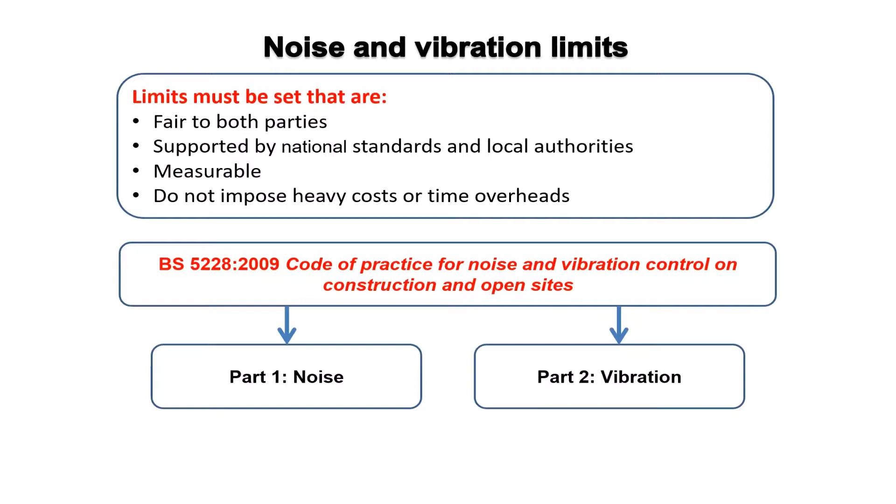Obviously, if we're going to set limits, then they've got to be measurable in some way. So we're going to have to put instrumentation in there so that we quantify noise and vibration, and I'll cover that in some detail. And we've got to be realistic that we can't put in instrumentation which is so expensive that it jeopardises the economic viability of the work. So we've got to be pragmatic about what we do here. And as I say, BS 5228 is an excellent code of practice, giving lots of guidelines and help. And I've brought some copies with me today, so if you're not familiar with that standard, it's worth having a look at.

Now, there's legislation which backs up the noise and vibration exposure of residents, and it's worthwhile just being aware of what that is, because that can have an impact on how you go about measuring noise and vibration. And the overall legislation is covered by common law, and in common law there are clauses which allow citizens who might be affected to prevent or secure the abatement of a statutory nuisance. That's the terminology that's being used there. And they specifically mention the control of noise and vibration from construction sites.

So at the end of the day, if everything breaks down, then citizens have the right under common law to try and get the work stopped. But there are some specific bits of legislation which are worth noting. There's the Environmental Protection Act, which gives the mandatory powers to local authorities to control a noise nuisance.

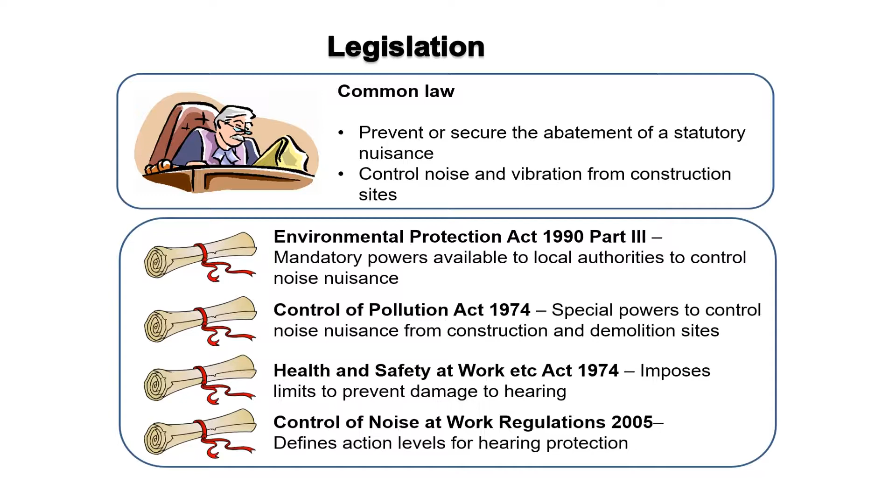And then there's the Control of Noise at Work Regulations 2005, and that defines the action levels required for hearing protection. Again, it's to do with workers on site and the level of noise that they can be exposed to. The Control of Pollution Act has two sections in it which are worth drawing your attention to.

Section 60 is all about the powers that a local authority has to, when they believe that noise is being exceeded or vibrations being exceeded, or when you start a project and you're applying for planning, specify equipment used. So if you're generating, let's say, a lot of noise from a site and you've done no liaison with the local authority in advance, and someone makes a complaint and measurements subsequently show that you are over an acceptable limit, the local authority can step in and specify that you use different equipment.

They can specify that you work different hours, and they can change working practices. So the local authority has a lot of power if you don't take precautions in advance of carrying out some potentially noisy work. But Section 61 of the same Act is a consent, and this consent is often in the form of a long form that you fill in with the local authority.

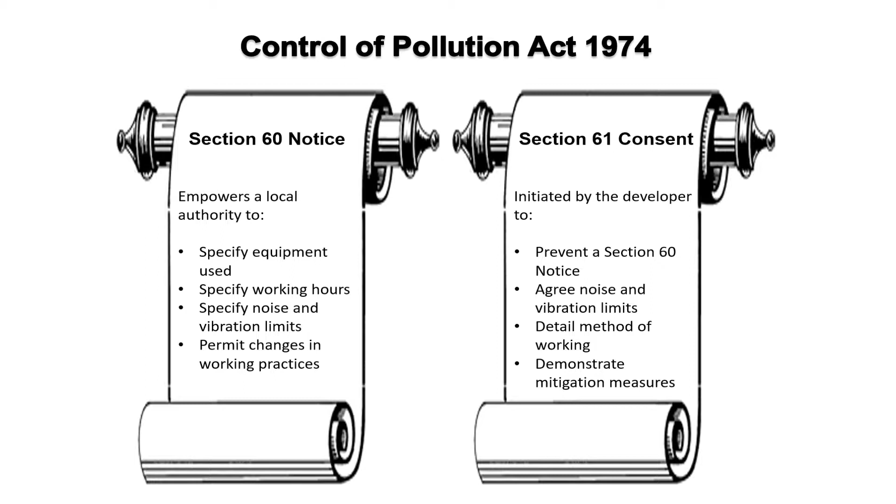So not only is it good practice, if you're going to do some noisy works, to plan what you're going to do in advance and to make sure you're using the right equipment, but if you agree with the local authority within a Section 61 consent in advance, it gives you the protection to ensure that your work won't be stopped, as long as you obviously keep to your agreement, by people who are complaining.

Just like to say a little bit about what is noise, physically what is noise. Noise is a sound. It's a pressure wave in the air that has been initiated by the vibration of some hard surface. So that hard surface might be a concrete slab, and you're hitting it with a metal chisel, and the surface vibrates. That causes the air locally to the surface to vibrate, and that transmits through the air and reaches your ears, where it's turned back into a signal and the brain interprets it as noise.

Generally, noise is defined as unwanted sound. So sound is the general term for vibrating air pressure, and some sounds are good, like music and speech, and you want to generate those sounds, and some sounds are unwanted, and we tend to term those noise. The pressure waves lose their strength with distance, so the further you are away from the source, the lower the sound. That shouldn't be any surprise.

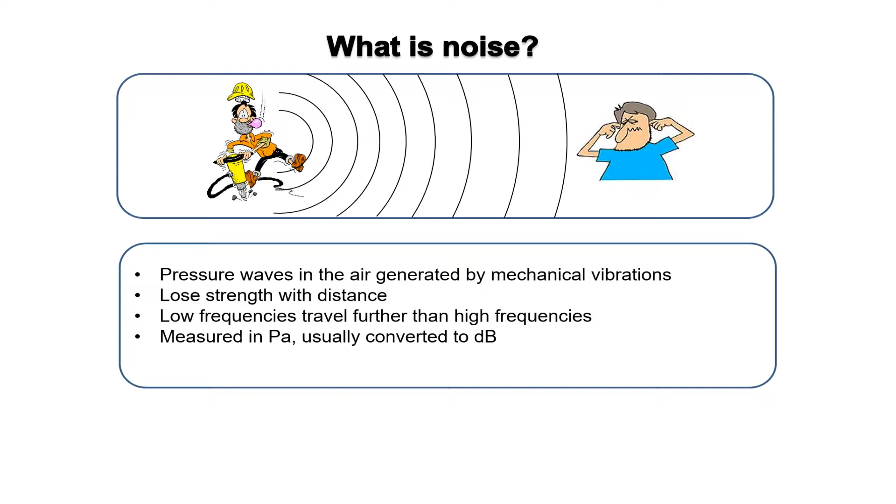Because noise is an air pressure, when a microphone measures it in the air, it's in a pressure term, like pascals. But we always think of noise in decibels, and decibels is just a logarithmic way of describing pressure in pascals. And we tend to use decibels as a logarithmic measure because our ears hear in a logarithmic sense, not in a linear sense. So it makes it more useful to describe a noise, air pressure, in decibels rather than pascals.

How does noise affect people? Well, unfortunately, it's not uniform. Different people are sensitive to noise in different ways. But in general, we can think of noise depending on how loud it is, what's the maximum pressure that we're generating in the air, how long we're exposed to it, so the duration of the noise, when it occurs, so if we hear a noise at night, we're likely to be more disturbed than we are during the day.

The local environment: if we're living in a busy urban environment, we're less likely to be disturbed by noise of a particular level than if you live in a rural environment where things are generally quiet. And tones in noise are also a disturbing feature. So if there's a background noise and there's a single tone in it as well, even though the level might not be excessive, you perceive the tone, and that can be quite disturbing.

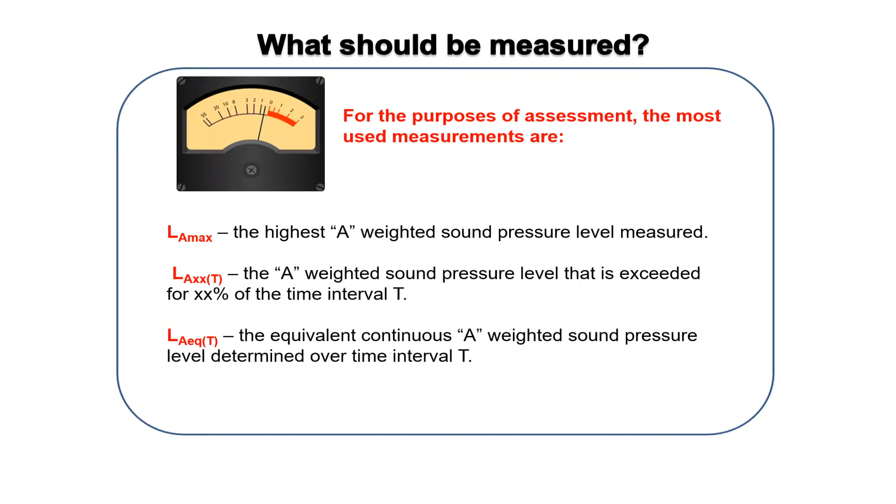LA is the A-weighted sound pressure level. EQ means equivalent, and T over a period of time. And essentially, the T will be either a 16-hour daytime period or an 8-hour nighttime period. That's generally how T's are used there. Although they don't have to be, they could be 1 hour, they could be 5 minutes. But generally, when the limits are set, they are for a 16-hour day and an 8-hour night.

And the LAEQ is the equivalent continuous noise level. So if you were to take all the noise gathered, the peaks, the troughs during the period T, and you do a logarithmic averaging of it to get to the equivalent sound level, you would arrive at LAEQT. The instrumentation will do this for you. It's too big a calculation for you to take individual measurements and try and do all that independently. But sound meters will carry out that averaging process to get an LAEQT. And that's the measure that's most commonly used when looking at limits.

Where should noise be measured? That isn't obvious either, because if you were to put a microphone in the middle of a field, perhaps I shouldn't use the term field, it's called a free field measurement, but it has nothing to do with the field. If it's unaffected by reflecting surfaces, then that's called a free field measurement. And it will be a different value that would be measured compared to putting the microphone close to a wall.

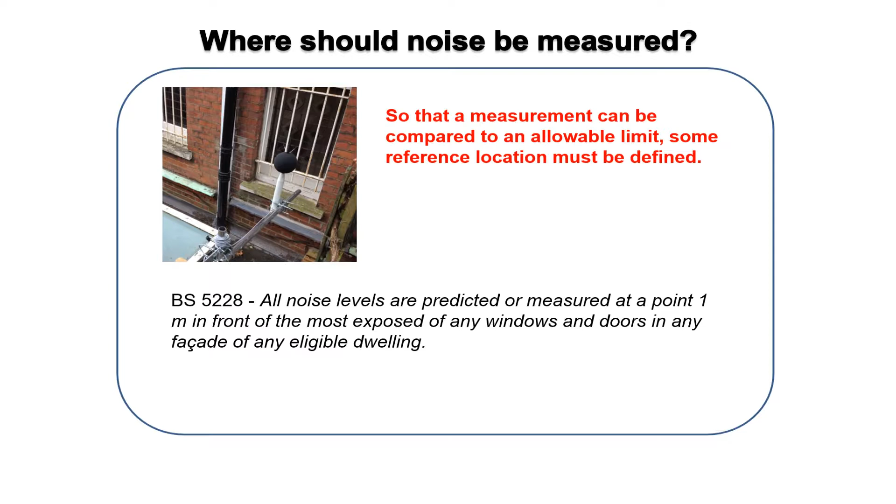So normal practice is noise levels measured 1 metre in front of the most exposed of any windows and doors in any facade of any eligible building nearby, any sensitive building, the one you want to protect. So that's where you should measure. We discussed what you should measure. Now we've got to set a limit for how much sound you should be exposed to.

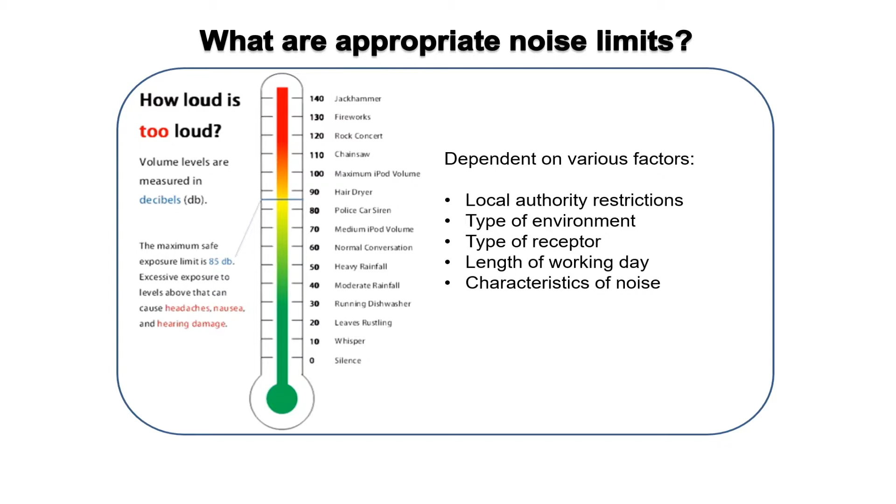Now I've put this chart here just to give you a feel for what decibel levels mean. So 0 dB is defined as silence. It's of course not silence, there's still some air pressure there. It's just the threshold of hearing of the most sensitive person. By the time we get to 60 dB, that's normal conversation. I'm probably speaking about 65 dB here, a bit louder.

When we get to 85 dB, that's the point where hearing protection should be worn. So if your neighbours are being exposed to 85 dB, then you're really putting too much noise over the boundary. And then you can get up to a rock concert at 120 dB. In my opinion, permanent damage is starting to occur at that point, so you should wear hearing protection at a rock concert. Fireworks, 130 dB, and a jackhammer, 140 dB.

So the most common limit level that's set is 70 dB. So we're talking of exposing people to a continuous level of something like a medium iPod volume, which would be one of the more common values that have been set.

Now, there are 3 ways in the standards for setting limits. The earliest limits, the oldest limits that were set, were from the Wilson Committee report in 1963. They're going back a long way there, where basically it didn't really matter where you were. You could expose people to 70 dB during the day and 60 dB at night, and we just set those limits, and as long as you adhered to those, you were deemed to be compliant. We're going away from that now, and you'll find those limits used much less.

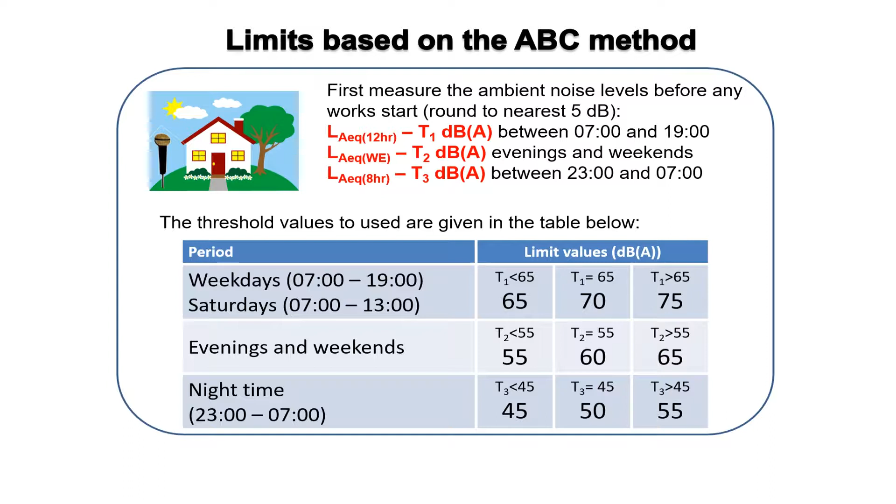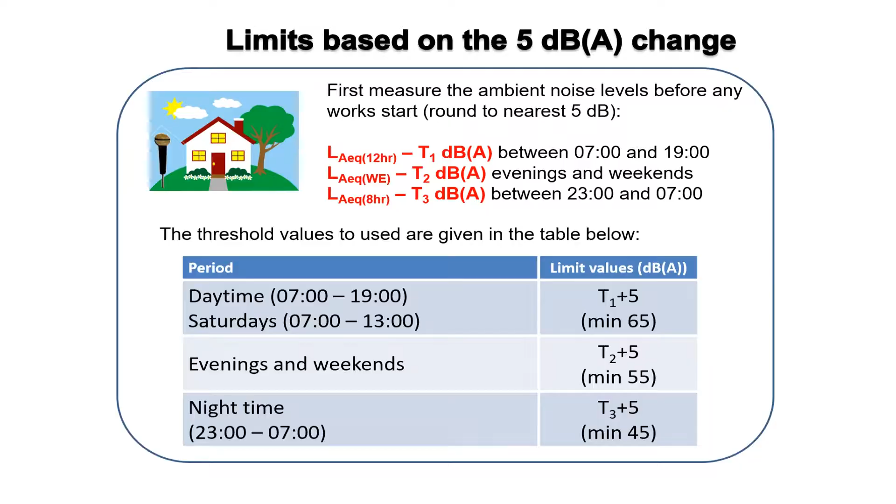So that's trying to take into account the type of environment that people are living in and assess the limit according to that environment. So if they're already used to a lot of noise, then they can be exposed to a bit more. And the other one is quite similar, and it's based on a 5 dB change. So again, you take the background readings in exactly the same way, and you are allowed simply 5 dB more than whatever that background reading was, subject to certain minima.

So during the day, the minimum is 65. In the evenings and weekends, it's 55, and at night times, it's 45. So it's quite a simple method, but there is a bottom threshold for it. How do we measure noise for comparison with limits? And there are various different ways of doing that.

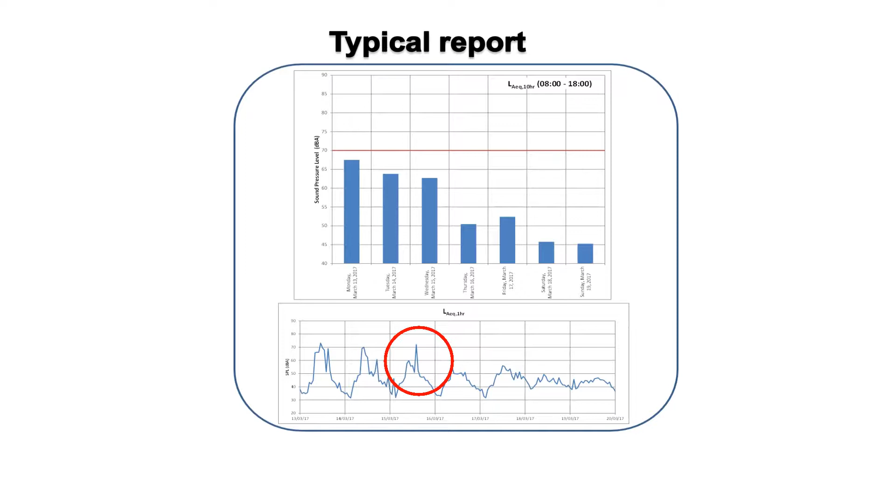And that can be quite useful, because if you take this particular day here, corresponding to that overall level, all we knew from this graph at the top was that the LAEQ value was whatever it was. Here we can say, well, it was really dominated by that peak, and we've got a time against that peak, so we can look at what activity was taking place at that time, and if we feel that that was going to push us over the limit, we can look at some way of mitigating that particular activity.

If we find that we are over the limit and we've got to do something about it, then the mitigation options we have are simplest. Let's just use less noisy equipment if we can, or use that equipment in a way that produces less noise.

So let's say we're breaking a concrete slab and it's generating noise that goes over the limit. Well, could we put a claw underneath the slab and break it up by lifting it, generate less noise? That's by far and away the best approach to mitigating noise.

We could time our noisy operations in a more sensitive way. Maybe we talk to the neighbours and say, we've got to do this noisy activity, when can we fit that in? And let them accept that we'll go over the limits, but at their convenience.

If neither of those are possible, then we can construct a noise enclosure around the object or activity that's producing noise. That might be a shed, acoustic shed. It might be an acoustic enclosure around a generator or something like that. The important part about that is we're putting the enclosure close to the source of the noise. That's always the better way of handling noise mitigation, is to be close to the source.

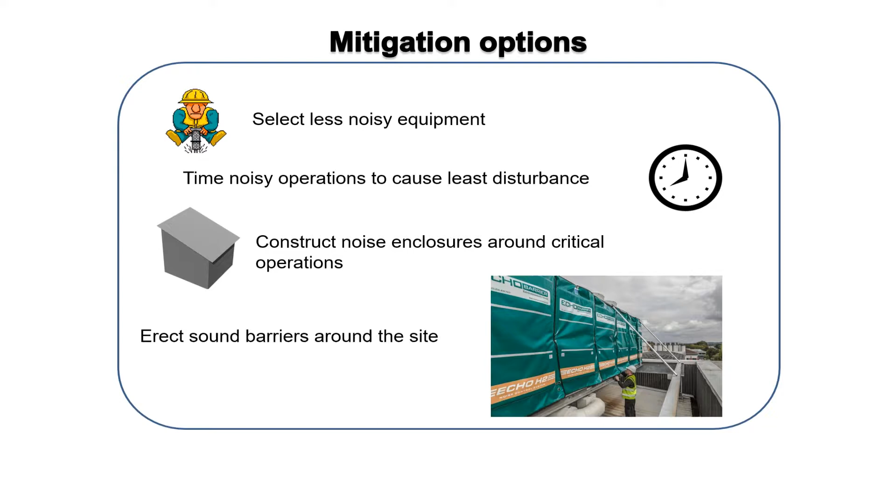If we can't do that, then the final and most expensive and the most complicated way of mitigating noise is to put a noise barrier around the site. And there are specialist materials that will both absorb and attenuate sound, heavyweight materials which you can put up on Heras fencing that go around the site. But it's the last option, really. It's the most expensive, most intrusive option. So if we can, work down through that list, go for the top ones first.

Right. If you put one of those walls, how many dBs will that knock the noise down? It's frequency dependent, but at the best you can get about 30 dB out of it. Yeah. So they claim. But, just to slightly digress on that, when they do the laboratory tests, of course, what they're doing is showing how much noise gets transmitted through that material. What they don't measure is how much noise has gone over the top. And so what I've said in the notes is, if you find you need this, go to a noise specialist to advise.

All these building sites now have these plywood walls around them. Presumably that knocks it down 3 dB. Yes, that will reflect the sound back, but they won't be as good as these by a good way. How many dBs would the plywood knock down? Well, you certainly get your 3 dB. You might get more than that, but again, it's frequency dependent, how high the plywood is as well. So it is very difficult.

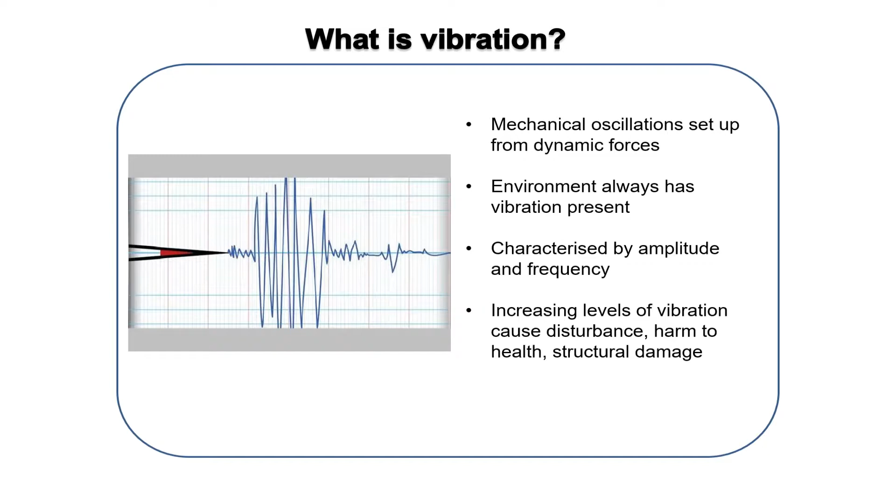And if we increase levels of vibration, then they can start to cause disturbance to people, which can be a very real disturbance, and they can get to a point where they can harm health. Vibration white finger. And they can cause structural damage. Vibration is transmitted from its source generally, and from what we're interested in anyway, through the ground.

So the source might be a railway tunnel, might be you hammering on the ground, any activity which is causing disturbance to the ground. Travels away in body waves through the structure of the soil, and then gets up to the surface and travels along the surface as surface waves. Then reaches a building in the building foundations, shakes the building, and that will be transmitted up to the upper levels of the building, and it can get amplified there.

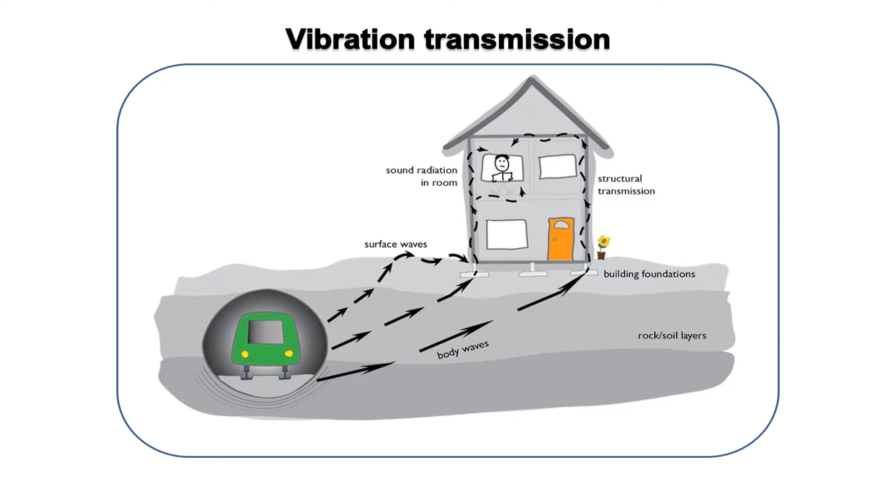That's one of the important points to note. You can get higher vibration, particularly at the top of a steel-framed office block. The vibration levels can be several times higher at the top than they are at the bottom. And vibrations can then cause things to rattle inside, and it comes out as noise, and people will get confused between what is noise and what is vibration.

But the source for what we're talking about now is ground-borne vibration, and that's where it originates. And that can have effects with nearby equipment. So if you're doing works next to anyone using optics, a hospital, research laboratory, anyone in manufacture that needs to look at magnified images, it could interact with that.

Electronics manufacturers need a stable platform, so if you're working next to a building making chips, then they will be affected by it. Anyone using lasers and other research equipment, and hospitals using MRI scanners are very affected by vibration. So if building work's going on near any of these, then vibration could be a particular issue. It can damage buildings.

It starts with plaster cracks, cosmetic damage. So here we're talking of quite repairable items of damage, but nevertheless noticeable and alarming to people when it happens. Then we can move on to concrete cracks. These two generally can occur from building works near to other properties. The concrete cracks are more serious in that we are now affecting the structural integrity of the building, and so if those are observed, then we should take action immediately.

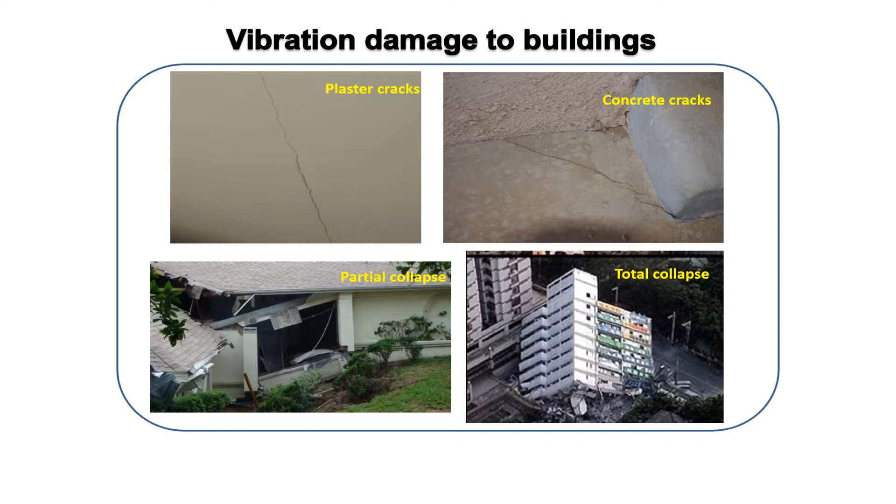If the vibration gets larger, then we can get partial collapse or total collapse of a building, but we're talking about earthquakes by the time we get to this level. And if you had an explosion on site, or if you dropped a very heavy object, it's just about possible you could get some of that. But really we're in these two categories here when we're talking of vibration damage to buildings from construction work.

It can have a bigger effect on people. Clearly anyone involved with very delicate movements, sudden vibration can be distracting, and well, if you're operating on someone's eyes, it could be more than distracting. So hospitals set very stringent limits on the amount of vibration that they will accept in sensitive areas like operating theatres. It can cause fatigue. If you're constantly exposed to vibration, then you get tired.

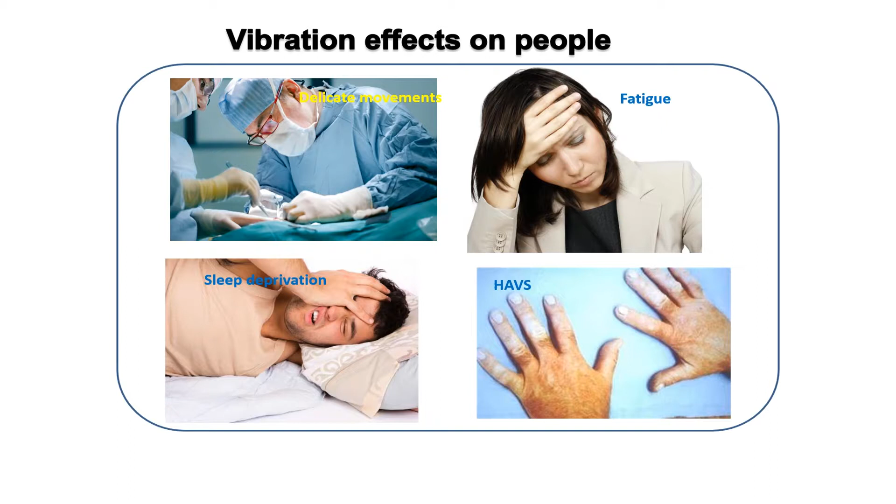At night it will cause sleep deprivation, and then in the extreme, when we have very high vibration, we can get physical damage to the nerves and blood capillaries, and get hand-arm vibration syndrome, white finger. Again, we're not so worried about that for neighbouring properties, but for workers on site, hand-arm vibration syndrome is a real worry that you need to take into consideration.

Vibration limits for buildings, how much vibration can we expose a building to, again are covered in BS 5228, part 2, the vibration section, which draws on another standard here. And it bases the vibration on the peak particle velocity. This is the largest velocity that's measured at a point close to where the building works are taking place. The limits are slightly frequency dependent, and they're dependent on the type of building that we're measuring.

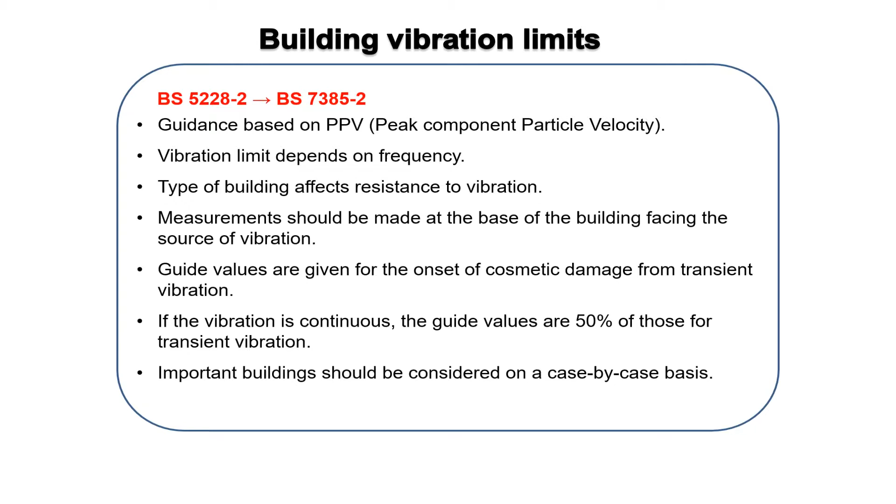So if we're looking at a domestic masonry structure, then we get one limit. If it's a steel-framed industrial building, there'll be a different limit that's appropriate. And those limits, which are reproduced in 5228 but actually come originally from BS 7385, are those. And this is saying that the peak particle velocity, so it's the largest velocity that we measure, for a residential property, is for the low frequencies 15 millimetres per second.

If we increase in frequency up to 15 hertz, then we can accept more, and eventually by the time we get to 40 hertz characteristic frequency in the vibration, then we could accept 50 millimetres per second. Now in practice it's actually quite hard to work out what the characteristic frequency really is, and so when I've done my work, I've tended to set the limit at 15 millimetres per second, and it's not often that that is breached, to be perfectly honest.

And these limits here are set for transient vibration. A transient vibration is an event that occurs as a one-off. So it might be a dropped object. By one-off, I mean it could happen several times in a day, but that it's not continuous vibration.

If we have a continuous vibration, which might be set up from, let's say, a generator running or a concrete pump running or something like that, then all of these limits should be halved. And the reason they should be halved is because we could set up a resonance in the building, and so we've got to take that potential into account. So if we're dealing with continuous vibration, then the limit should be 7.5 millimetres per second.

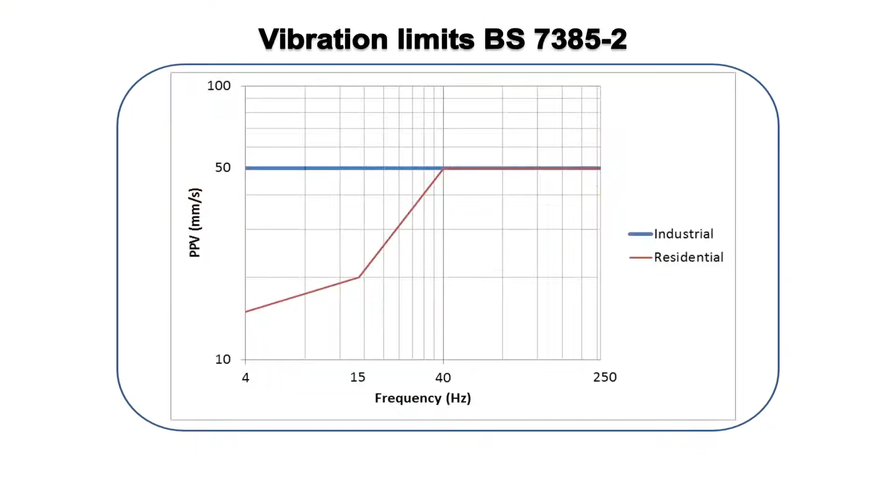You'll come across some specialist vibration limits as well for properties which don't fall into the general heavy industrial or residential categories. So the first one I've put on here, buildings of great intrinsic value or in a delicate condition, where you really must not damage them. And our British standards give no real help here at all, and the nearest information that gives definitive limits is the German DIN standard, where they talk of peak particle velocity values of down to 3 millimetres per second, which is quite sensitive.

MRI scanners have very precisely defined limits, and normal monitoring equipment just won't monitor to see whether you fall inside these frequency dependent acceleration limits. So you have to do something quite specialist if you're going to be operating or doing works that create vibration near an MRI scanner. And they tend to be acceleration based.

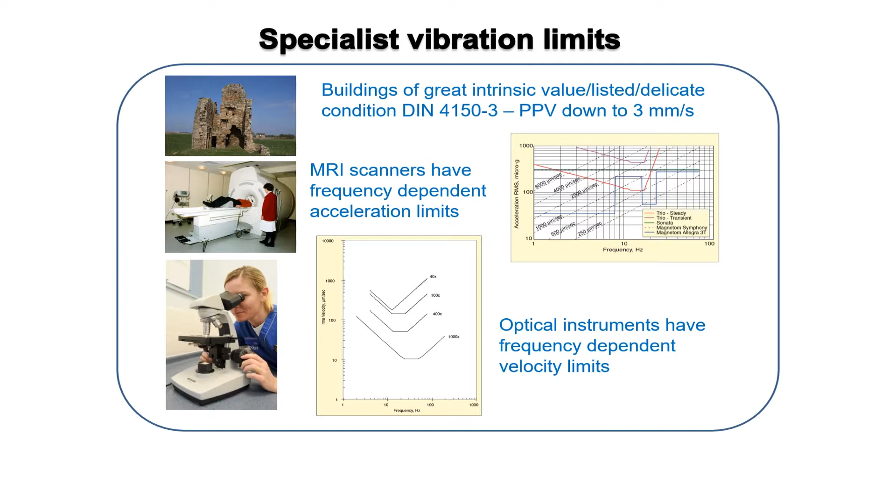Optical instruments tend to have velocity limits, which are again frequency dependent, and these different limit curves here depend on the magnification of the instrument you're using. So if you're using a times 10, or whatever that is, 40 is it, then you can accept much more vibration than if you're using a times 1000 instrument there. So those are the specialist vibration limits for equipment and for buildings.

When we get to human response to vibration, it becomes an order more complicated. And it's because the disturbance we feel from vibration depends on so many factors. It depends on our age, our health, where the vibration is coming from, which direction it's coming in, whether we're sitting, standing, lying down, what frequency the vibration is, how long we've been exposed to it, how big it is. All of these things can affect how we're disturbed by vibration. And the latest research, and now the standards are beginning to adopt it, comes up with an exposure value, a vibration exposure value.

So it accumulates all the vibration you feel in the course of a day or a night, and you end up with a single value at the end of it, the vibration dose value, which is how much exposure to vibration you've had. Then we can look at that value against a limit to say, yes, you've probably been disturbed by that vibration, or you've definitely been disturbed by it, or no, it's unlikely you would be.

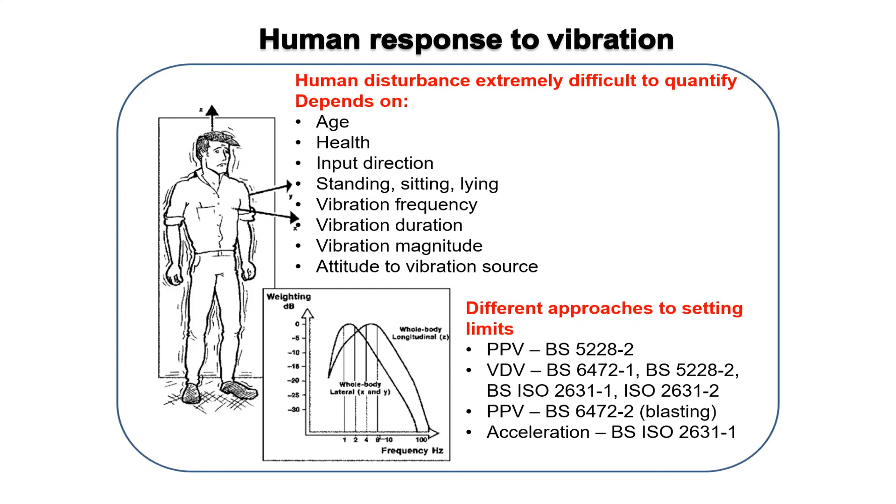And because we feel vibration differently at different frequencies, we have a weighting factor like the A weighting for noise, but a vibration weighting factor for how our bodies perceive vibration as opposed to how an instrument receives it. And that weighting factor is different for when we're lying down, standing up, and so it becomes a nightmare to deal with. Fortunately, the standards say, well, that's too complicated. We'll just consider one of the weighting factors. And the weighting factor that they prescribe is called the Wm weighting factor. Again, instrumentation that you use for measuring vibration has all this built in. So this is just background knowledge, and you don't need to know it.

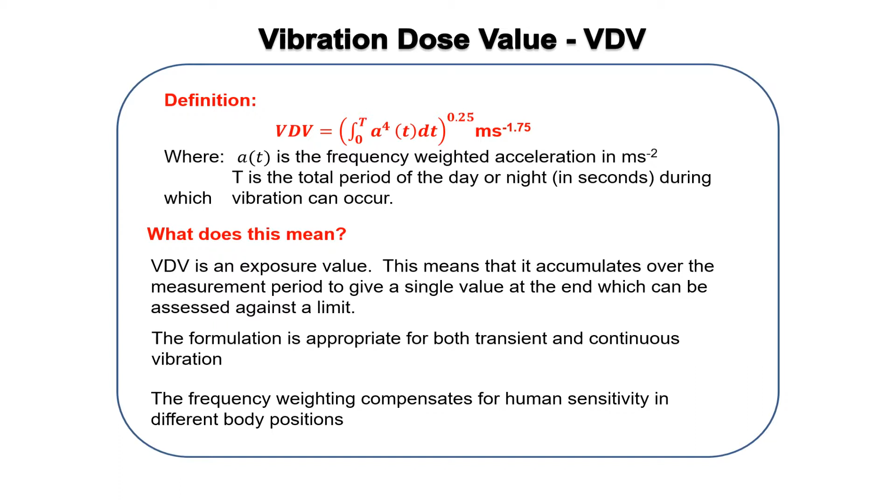I thought I'd put in what the vibration dose value was, because there's a nice little elegant formula there, which again you won't have to worry about because you won't be doing that integration. But it's been defined as the time integral of the fourth power of acceleration to the power 0.25. So you end up with a unit of exposure of meters seconds to the minus 1.75, which I think is just wonderful. Never have I seen a unit like that before. However, you don't need to worry about the units or the formula, because the instrumentation just comes up with these vibration dose values, and all you do is say, are we above the limit or are we below it?

And the important thing is that it's an exposure value. So you can accept one or two large bumps in the day, and you might just be under the limit, or it might be you've got continuous low-level exposure and you'd come to the same limit. And apparently that's the way that we are disturbed by vibration, equally by one or two big events or continuous lower events.

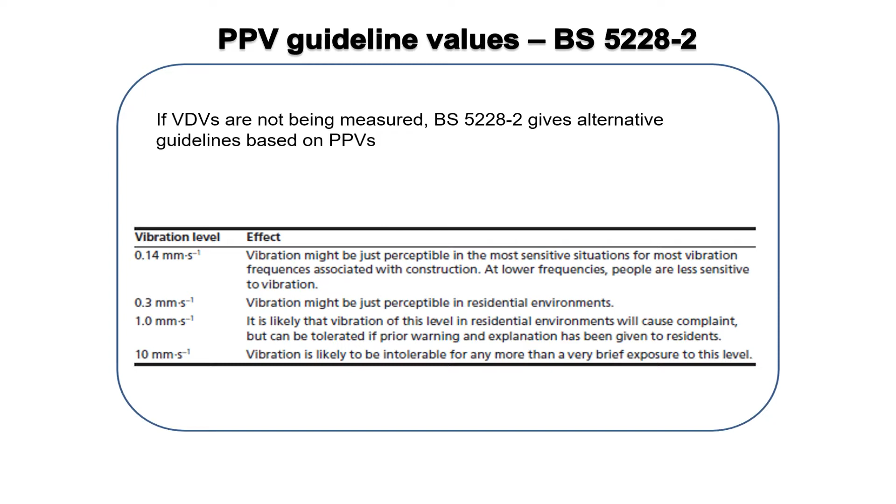The guidelines for vibration, the earliest guidelines, are still based on PPVs, peak particle velocities, because in the early days instruments could only measure peak particle velocities. And all that's telling you are the levels of vibration velocity where you're likely to feel it, or maybe not feel it, or maybe be slightly disturbed by it. These guidelines are generally out of date now, and you won't see those so much.

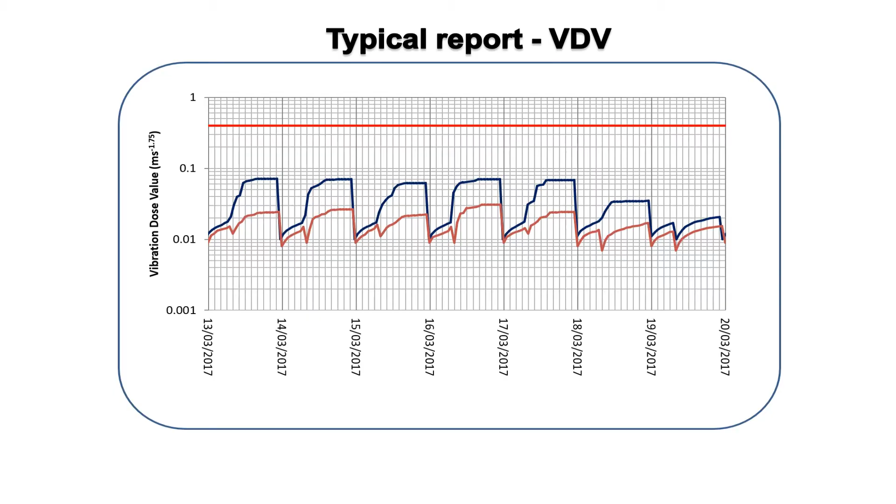And then it drops down as we reset for the night period. The night period accumulates very little vibration because people weren't working at night, and then we start the next day period again, and so it goes on. And weekends are quieter. They're obviously doing a little bit of work on Saturday there and no work on the Sunday. And there's two lines on here because they were from two different monitors. So one was closer to the works, the other was further away. But in both cases, they were nowhere near the limit. This is on a logarithmic axis here. So there would be no justification for anyone saying we were disturbed by the vibration.

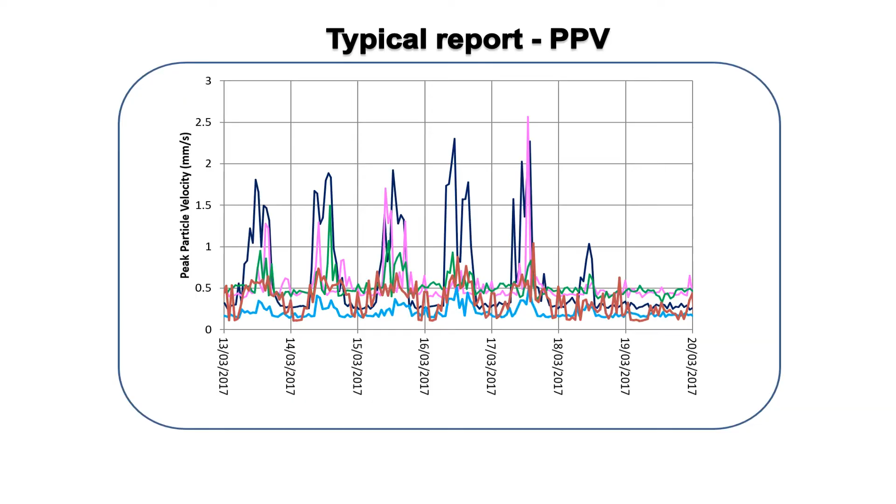This is from 5 separate sensors. This is the peak particle velocity. Remember I said we'd generally take the limits at 15 millimetres per second. Well, in this case, we got to about 2.5 millimetres at the worst time during the week. So again, there would be no justifiable claim from anyone that there was any vibration damage when we got values of this sort of level. And that was it. I think I might have overrun my time.

Can I ask you a question, if you don't mind? A typical day for you, right? We've got a site in Swansea Marina where they are going to be piling. I'm a party wall surveyor. Next to it is a fish market, chandlery and a restaurant. Industrial buildings. I've suggested that piling should have some type of monitoring considered, and I'm being told that I'm being completely over the top. Leave it to the engineers, why are you getting involved, blah, blah, blah. So, on a job like that, how would you be approached? Would you be approached by the engineers? Would you be approached by the contractor? Or would it maybe come via the environmental health department of a local authority?

How does it work? I can tell you who wouldn't approach us, and that's the piling contractors. They don't tend to like this being done. Although that's a bit unfair. Local authorities will be very keen. Is it impact piling? Yes. Yes, they would be very keen to prevent. They're the freeholder of buildings next door as well. Are they? Well, I would have thought they would have been quite anxious about that.